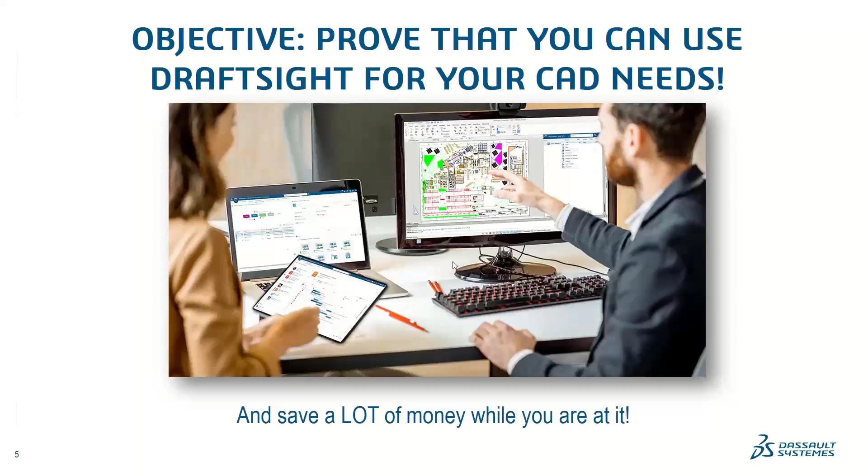So the objective for the webinar: we would like to prove to you that you can use DraftSight for your CAD needs, and at the same time save a lot of money while you are at it. So why is DraftSight a good solution for you? We think it's a good solution if you would like to save a lot of money on your CAD tool, or at least save money on your CAD tool.

You want to have flexible licensing. We do have both perpetual and term license options. You want to have the multi-user option with network licenses, as many big organizations do. This is a great opportunity to have a multi-user option, and many companies even want that, to have one license where many users can use it. But we do also have standalone license options, in case that's something they'd prefer instead.

And also, you have the possibility to choose a cloud solution. This is very beneficial if you are working from home or want to collaborate with your colleagues on a close basis, for example sharing documents, chatting with them along the way when working in your files, etc. So this is also a possibility on the standalone model.

If you're unhappy with your existing CAD company, for example, we know that AutoCAD is moving from a multi-user option to a standalone option - but that's maybe just one reason. There could be other reasons why you want to move over from your CAD company, and in this case, DraftSight can be a really good opportunity for you.

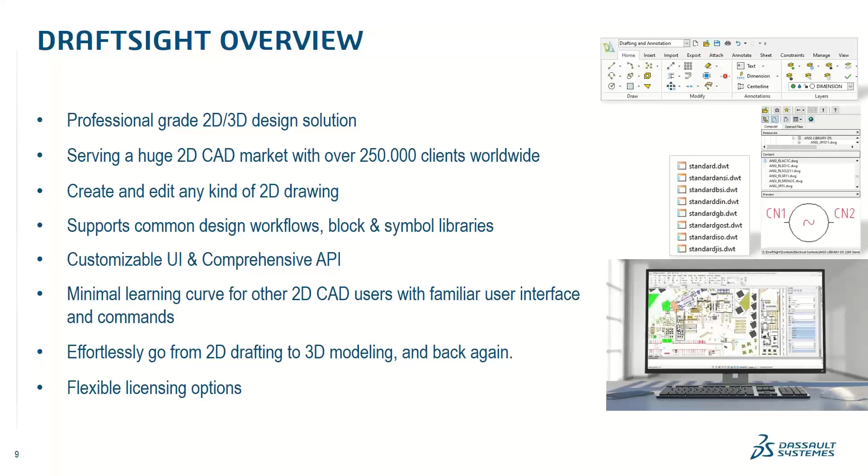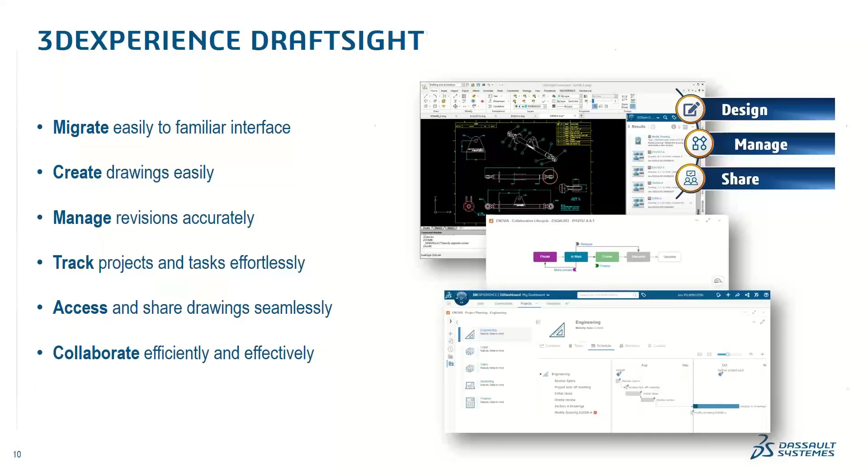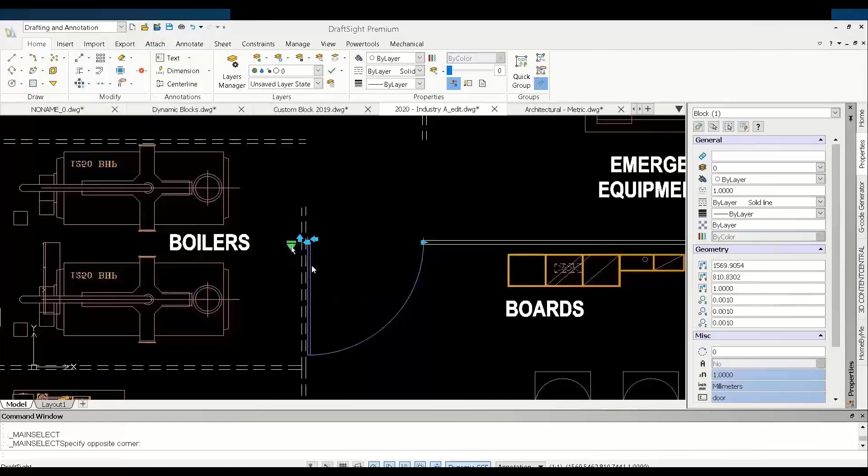So dynamic blocks represent really a more intelligent evolution of blocks that we've kind of used in CAD software for years. And the difference is a simple block like this has no real intelligence. At best, you can scale it, rotate it, but not really much else. Now, a dynamic block or a custom block from DraftSight has additional grips and far more intelligence, like this door. For example, we could

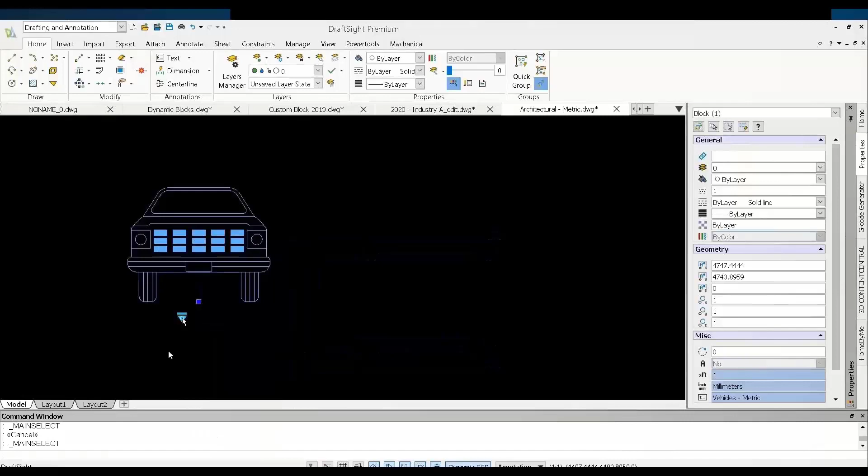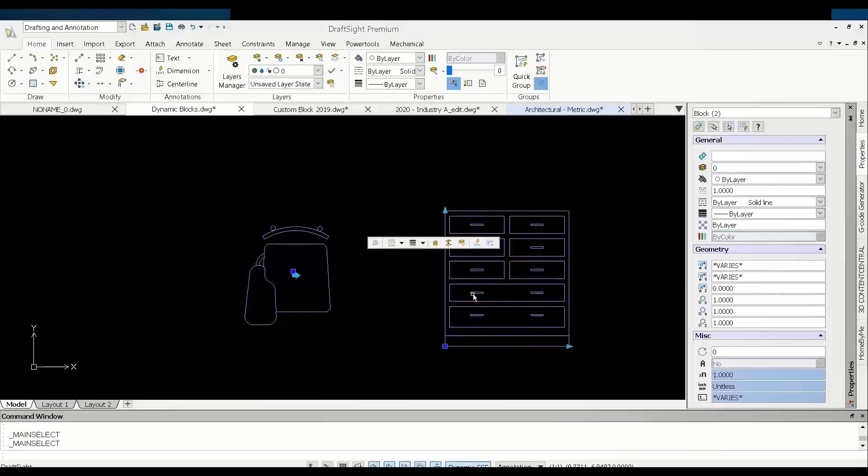If we take a look at a few more examples that illustrate different cases, in DraftSight you can work with both dynamic blocks created in AutoCAD and the custom blocks created in DraftSight. And the thing is that the custom blocks in DraftSight work just like dynamic blocks from AutoCAD. The only difference is that the dynamic blocks are created within AutoCAD and can be used within DraftSight as well, while custom blocks are created and can only be used within DraftSight.

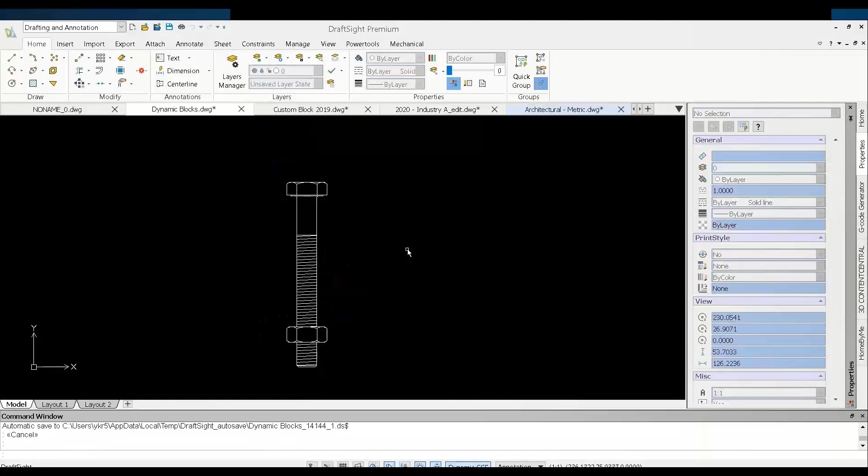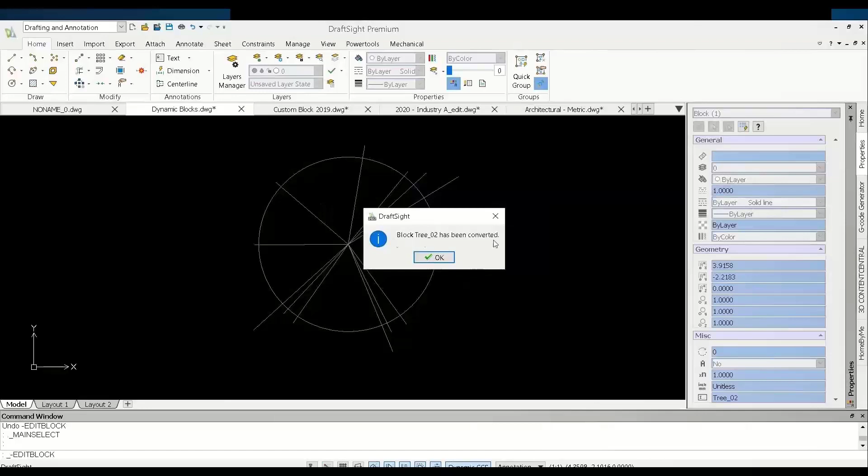So an example, if we right-click on this dynamic block from AutoCAD, DraftSight shows us a new option which will convert it to a custom block. And if you click OK, it'll still allow us to edit the block, but it'll just be a simple block, and all the parametric actions that were configured would have been lost. But instead, if we choose to use the convert option, the block editor opens, and now we can see that DraftSight does a great job of retaining all the parameters like length that were previously contained within the block.

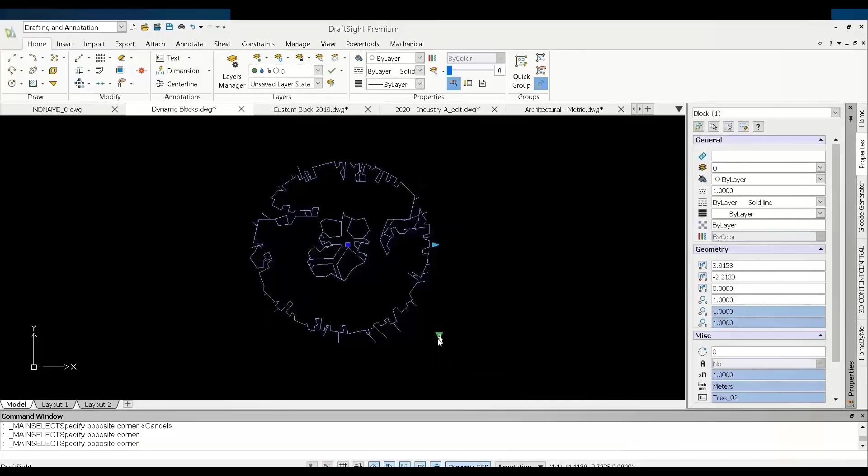Now, the block editor can give users access to the block authoring tool palettes with predefined parameters, actions, and constraints. And the ability to convert dynamic blocks into custom blocks makes it much easier for users to convert and improve on what you've already done without having to start from scratch. And let's take a look at this example. When we converted this dynamic block into a custom block, you can see that the visibility states are kept intact, as well as action grips and grips to modify the radius.

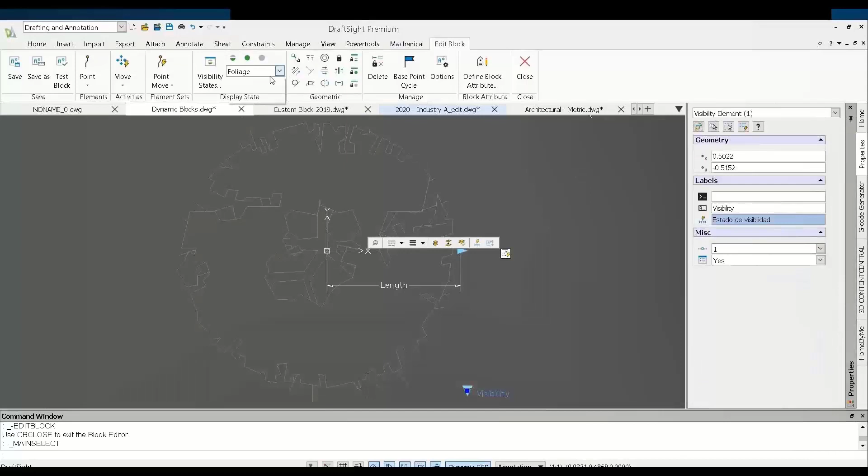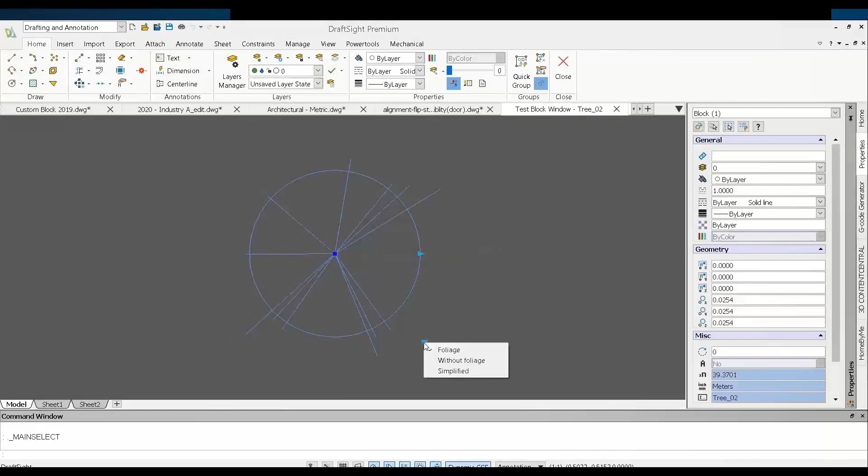And now under the visibility states, you can see there are 3 options with names, but they're actually written in Spanish. So you could go ahead and delete or add more states. In fact, what we'll just do is go and change the names into English. So now we can use the test block feature, which is really cool, and that lets you test the modified block before returning to the drawing. So it just gives you a bit of a what-if kind of testing environment.

So if I close the test mode and the block editor and save the changes, now the block will have the same capabilities as if it was a dynamic block, but it's now a custom block that can be reused wherever you want within DraftSight. So some really cool enhancements to be able to take these maybe dynamic blocks from AutoCAD, convert them, add intelligence, and reuse them within DraftSight.

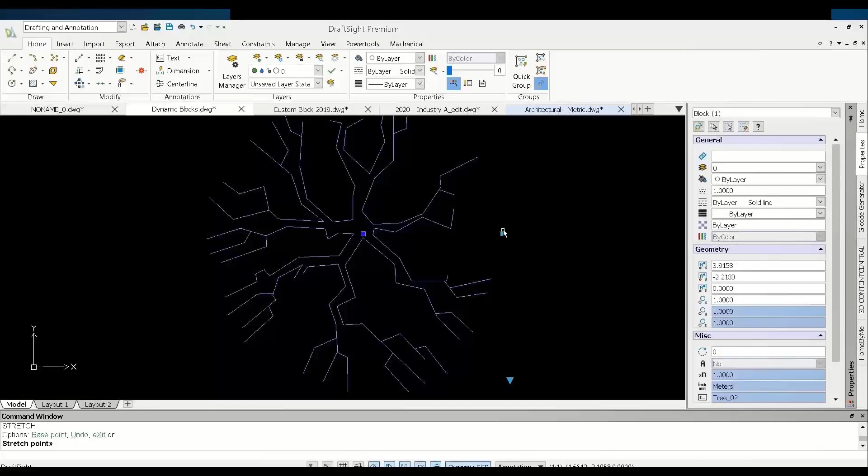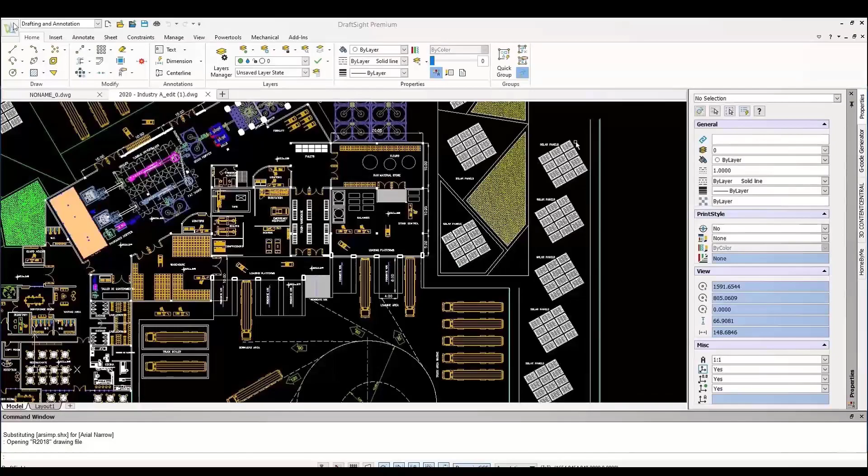So the next enhancement is a little bit simpler to understand, I guess, and that's dark mode. Now, many Windows applications, including SolidWorks, which I'm involved in, have had dark mode for 2 or 3 years. And this was a very highly requested enhancement for DraftSight 2022. So let's take a look at how simple it is to switch to dark mode. Basically, there's a right mouse button option in the menus. If you save your files, switch the UI and open DraftSight again, that's it. Basically, switch to dark mode.

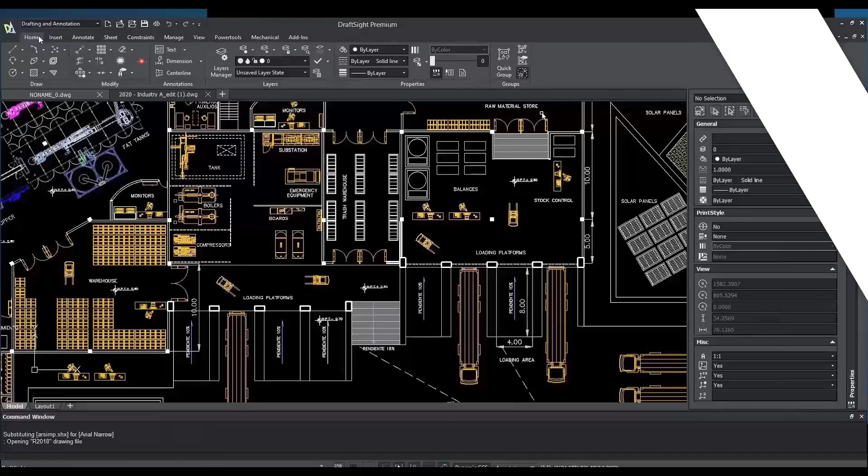And of course, you'll see when you open the new drawing or open your existing drawings in dark mode, all the menus, ribbons, palettes are all in the dark mode. As I said, this is a really highly anticipated and requested feature that we've included in DraftSight 2022, and it makes it much easier on your eyes. For example, I tend to use most of my software in dark mode nowadays.

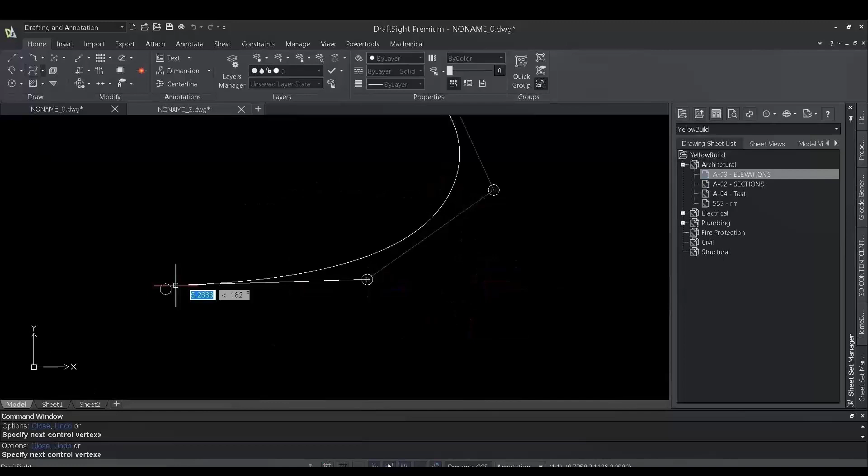So the next one's spline. For those who make smooth lines, the spline command in DraftSight is used to create smooth curves which pass through a set of predefined points. Now in DraftSight 2022, you can use control vertices rather than the simple fit points that we had before as a method to create and control a spline.

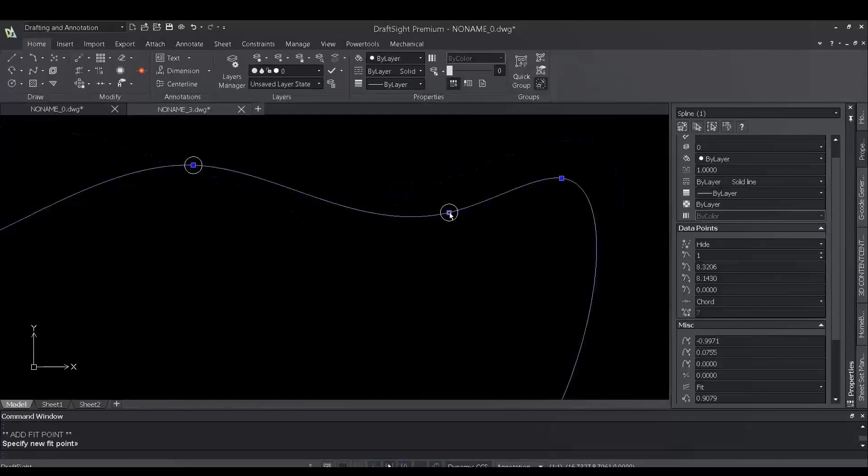With this method, you can clearly see the control vertices pass through the reference circles rather than the spline itself. Controlling the spline using these control vertices provides much better results than just moving the fit points manually. New properties are added for a spline in the properties pane for things like how it was created, the degrees, and whether the spline's closed or not.

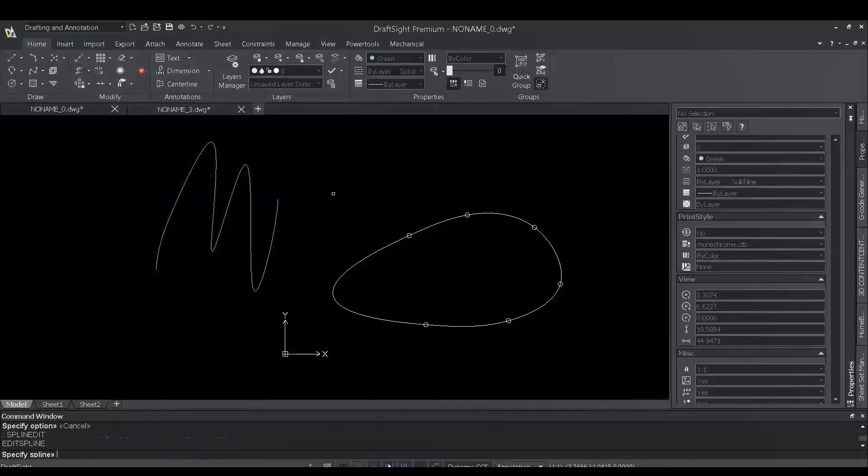There's also a new spline edit command with multiple options to edit the spline. And a much requested enhancement in 2022 is the ability to now convert a spline to a polyline. So that's a nice addition that we've got coming up in November.

Okay, so the next topic is a big one. This was brought in DraftSight 2021 around the sheet set manager. It's a really handy organizer to help you manage a large set of drawing sheets across multiple DWG files without having to open the sheets individually, for example, to apply the properties and print settings globally.

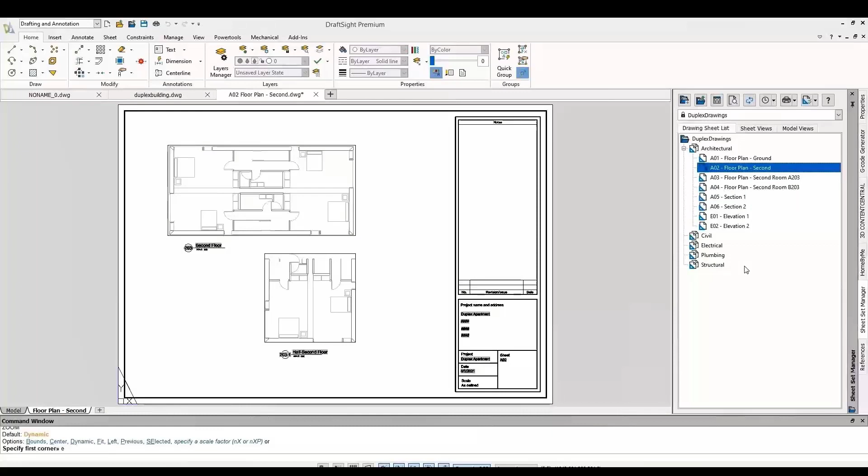You can create a subset that controls selected sheets more precisely and efficiently. You can apply properties from the top level to save time and make sure consistency is across the board. And DraftSight 2022 provides additional enhancements to the sheet set manager functionality. So let's take a look.

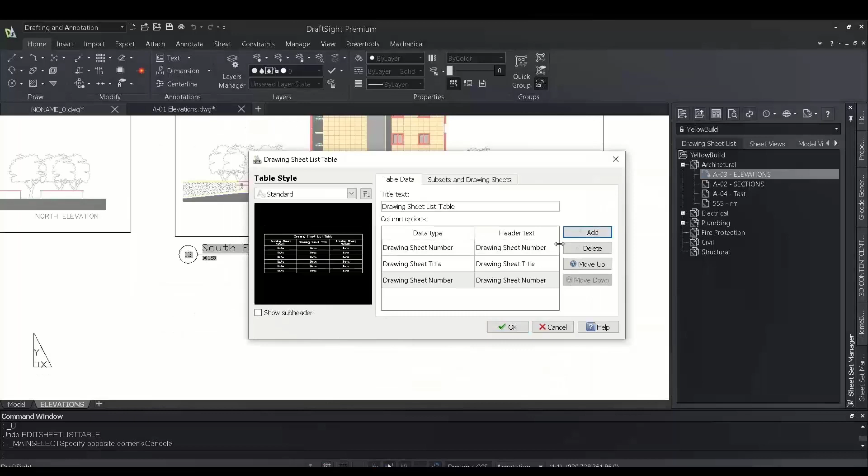You now have the ability to create a customized summary table based on the sheet sets, and you can use the sheet list table to quickly access and open any of the sheets on the list. You can also customize the sheet list table by specifying the data type you wish to be displayed, like the sheet title, or in this case the drawing sheet number.

We've also added a new option of named selection sets. This allows you to name a selection of sheets and recall the selection for later use. This is really useful where you need to do repetitive actions like plotting or publishing for a select set of sheets. You can save these sheets as a selection set and use them later to quickly plot or publish. It's a real time saver.

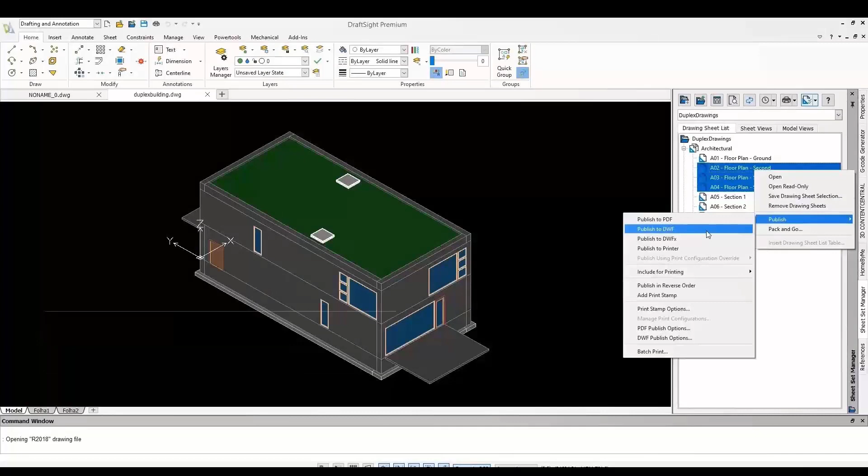The DWF publish feature allows users to output each selected sheet to an individual DWF file, and this can be shared with others who want to review the file but don't necessarily have access to a DWG editor.

If you've ever sent what you thought was a complete set of drawing files to a client or a subcontractor, invariably they come back and ask for missing information like the slides, fonts, xrefs, or other drawing files. This is a common issue, and Pack and Go in DraftSight can really help.

Pack and Go packages all the drawings and support files needed to properly display for your client or subcontractor. It can even create a zip file or a folder with all the drawing and support files for your project. Using Pack and Go, you'll no longer need to send a missing drawing or support file after the fact. All the files will be included in one convenient package.

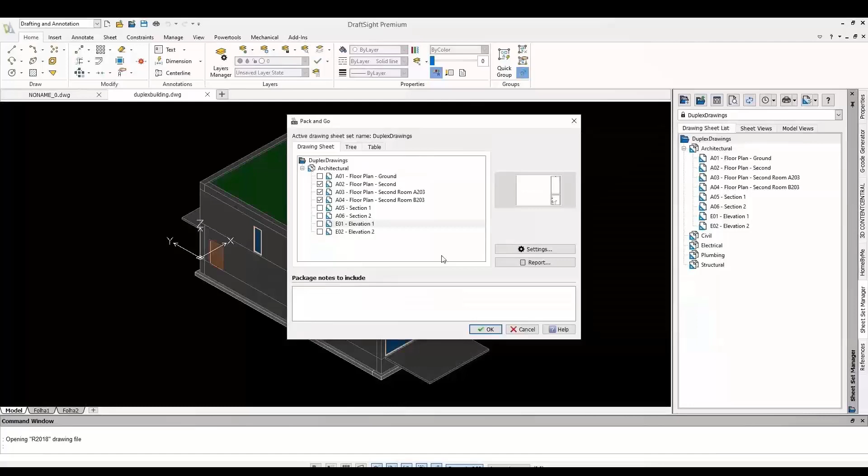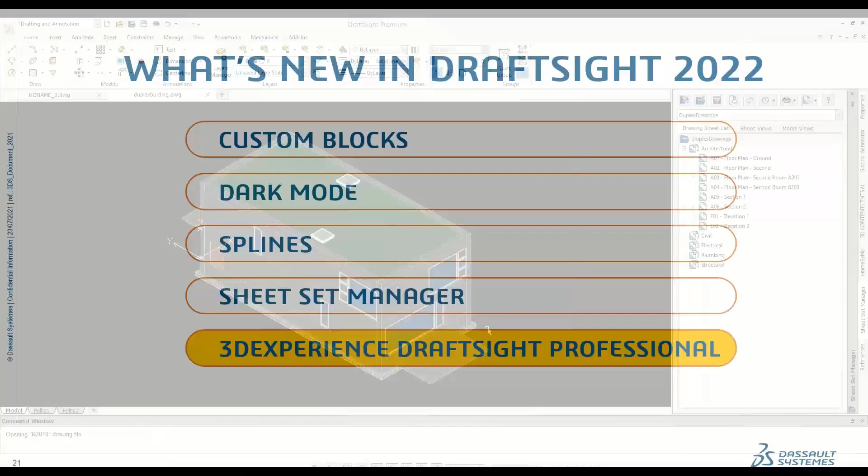It can be really time consuming and very error prone to organize and print large amounts of drawing sheets across huge DWG files. So these enhancements to DraftSight Sheet Set Manager will definitely save a lot of time and effort organizing these massive sheet sets. Okay, so those are the enhancements in core DraftSight 2022.

Annika touched on the next subject briefly in her introduction, but I'm going to talk about it in a little more detail and show you what it looks like. This is 3DEXPERIENCE DraftSight Professional. The fundamental part of this is we've listened to how many of our users work, whether with 2D or 3D.

The core fundamentals are that you as designers want to design, and we don't want to take the focus away from your design processes, but we also realize that you need to manage the files you design, and invariably you want to share them, internally with a design team or externally with subcontractors, suppliers or customers. Having a secure, convenient way to do this is really important. This is why the 3DEXPERIENCE platform is perfect, especially for 2D users, to manage and share using an established cloud technology.

So I'm going to take a quick poll on this. Just bear with me a second. The poll is, do you often need to share your content? Okay.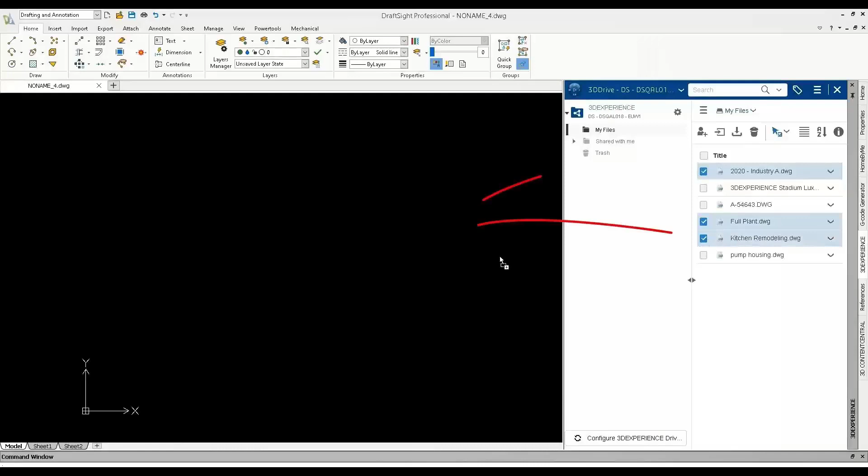We're looking at our cloud storage over here. So the user's selecting the drawings that they want to work on, and just by dragging them into the DraftSight interface, we can see we've opened our three DWG files: the industry A, the full plant, and the kitchen remodeling drawing. Admittedly, a different set of types of drawing, from a full factory layout to a kitchen, but it just shows how easy it is to drag your content from your cloud storage straight into the DraftSight interface.

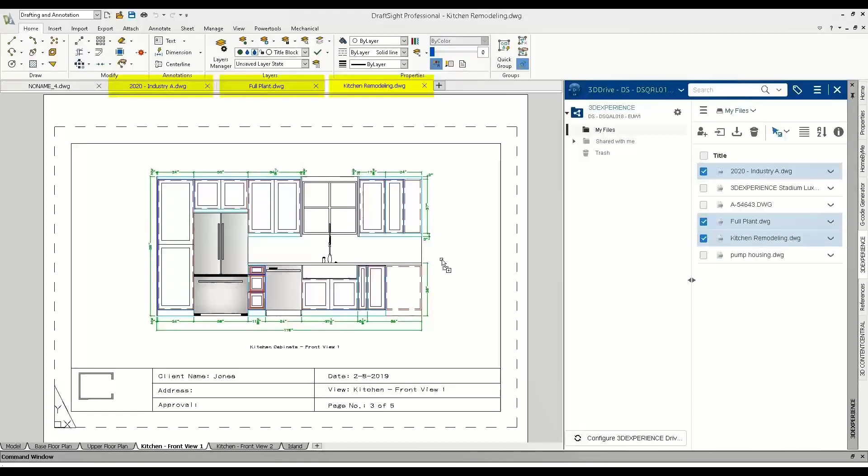If we move on now, we're inside the plant layout, and we're going to make some changes. So we've got a couple of trucks there, and we're going to turn that into three. We've got an empty bay there. And when we hit save, we can see that it is now saving that modified file back up into the cloud. Okay, so that's just showing Windows Explorer, which gives you a view of where your files are stored.

Okay, so let me go to the next. I'm just having a few PowerPoint problems.

So when we go back to our web page, now when we refresh the viewer over on the right-hand side, you'll see that that change is automatically updated. So anybody who's got access to this will see the change. And in fact, we've got tools within this viewer to allow us to redline and markup onto the viewable. So we're not actually modifying the DWG file, we're just adding useful comments on there for other people to take advantage of.

And in fact, another part of the demo that we don't necessarily show in this format is we can take that DWG file and share it in a community, and a community is just almost like a Facebook-type process where different people can comment and add ideas and share information.

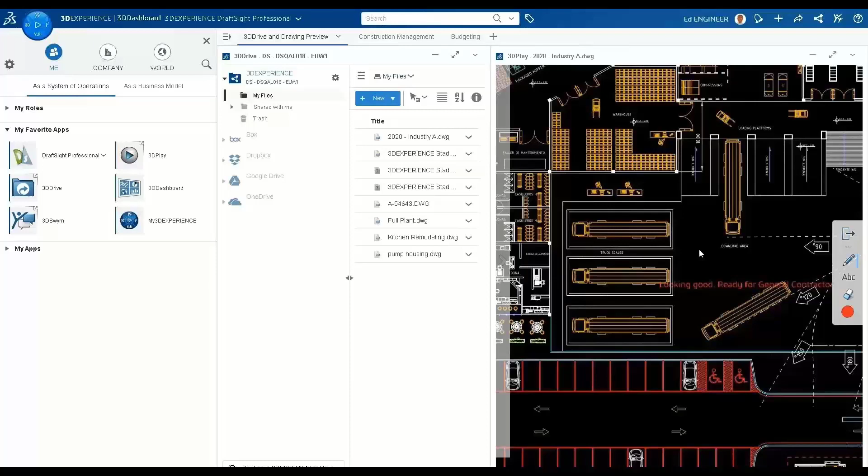So now that we've modified that file, we can see that information at the top, the industry A has been modified, and we can see when it was changed and who changed it. And I might want to share this modified file with another member of the team. So if I share it with a user general contractor, add a comment in there for Gill, the concept is ready for the meeting,

it means that everything is controlled and shared rather than just sending random emails around or even using something like Google Drive where we don't necessarily know exactly which file we're going to be talking about. Another question we get asked about with the sharing is, can I just share it with someone who's not in the 3D Experience platform?

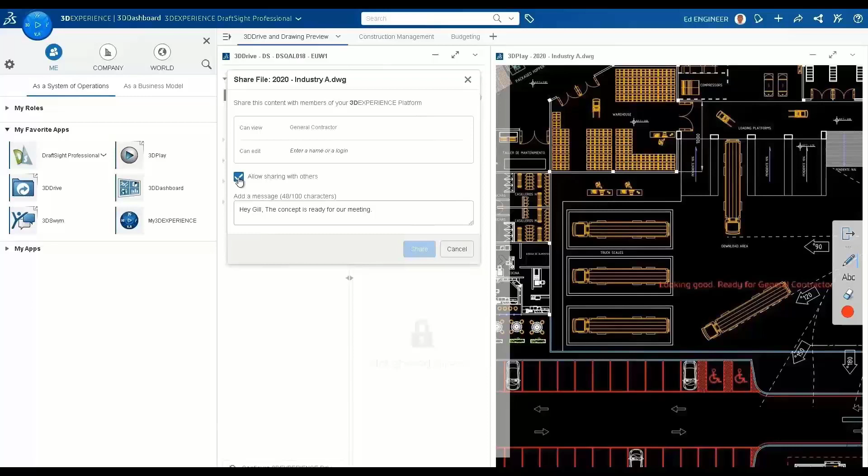Of course, you can just send a link to that DWG file, which will allow that external user the ability to just click a link and download the DWG file and work on it and send it back to you. But of course, the key is that everything is stored for yourselves within the security of our cloud platform.

So in summing up around 3D Experience DraftSight Professional, of course, we don't want to take away that creativity that all you guys exhibit every day around design, whether it's 2D or 3D. So the top point is always going to be paramount. The design and the innovation is key.

What we want to add is a capability, of course, to be able to manage that data securely in the cloud, so you know that it's always safe with version control, maturity, and all of that. And then, of course, being able to share all that great content with anyone who needs it, and make sure that sharing is secure and people are getting the right information at the right time.

Okay, so that's me finished, Annika. Do you want me to hand back? Yeah, please. And thank you so much, Ian.